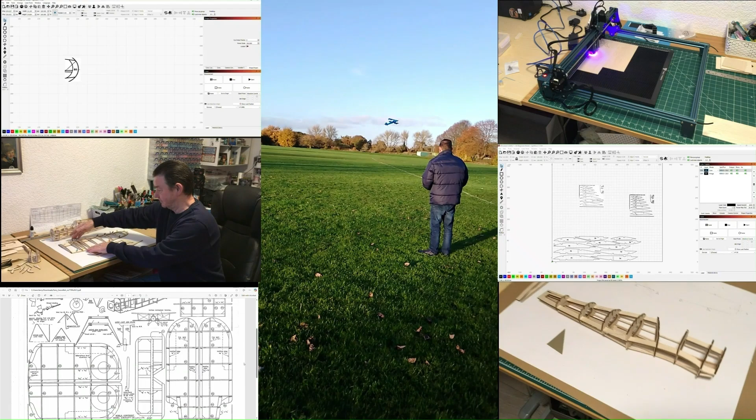Okay, so it's time to start creating the fuselage. Now I'm going to go by the rule that the fuselage should be around about 3/4 of the length of the wingspan. The wing we've constructed here is 500mm long, which means the wingspan is going to be 1000mm. So our fuselage needs to be 750mm long. So to start with, I'm going to create a center line.

I'm just going to put that center line there, and then I'm going to go to nodes. I'm going to select our center line, hover over it and press A. I now know that that center line is level. So I'm going to now make the first basic shape, a rectangle that is 750mm long, and that is basically going to be the center part of our fuselage. That's how long it's going to be. Let's move those down a little.

Okay, so the next thing I'm going to do is create another rectangle. Now this is going to be the cabin. The wing is going to sit on top of that, so it needs to be at least 150mm long. I want a little bit in front and a little bit behind, so I'm going to make this 170mm long, so that I can put something at the front to hold the wing in place and something at the back, and by doing that the wing will be secure and held nicely when we're flying.

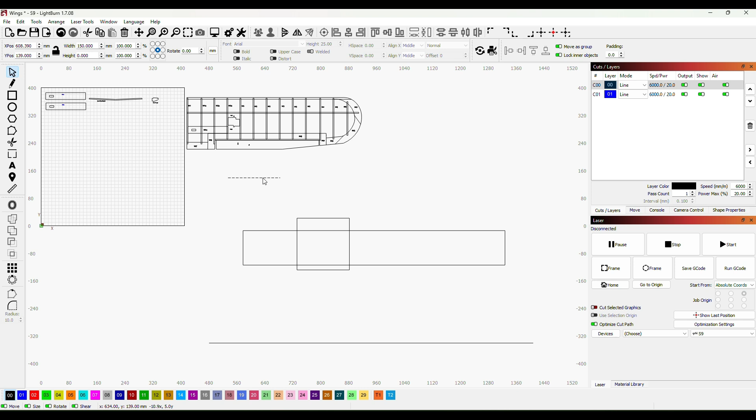Okay, so the next thing I'm going to do is drop the height of this to 150, just as a start point. Just check that we're in the right place still. Yep, that'll do. Right, now I'm going to select both of those, and I'm going to weld them together.

Bring our center line back, and I'll just center those using this tool up here. Now what I want to do is work out where the tail plane is going to sit. The leading edge of the tail plane should be behind the leading edge of the main plane by 3 times the wing chord. So 3 times 150mm is 450mm, so we change the length of our measuring stick to 450.

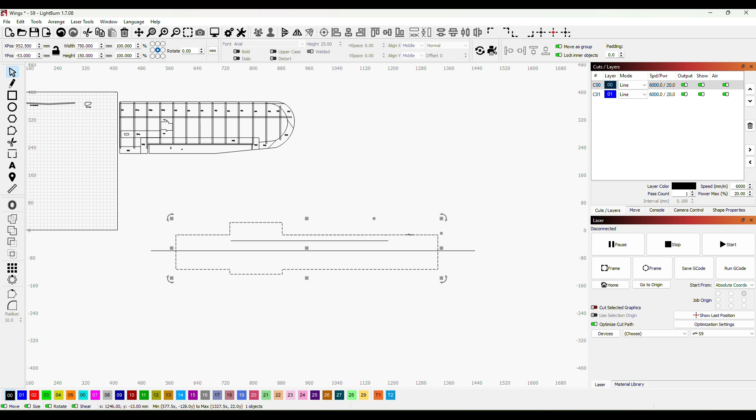Then all I need to do is drop this down here, and that's now in line with the front edge of the wing, and in line at the back here. So I go to nodes, and put a node right above that point. Hover over the line, press I, and then bring that node down until it reaches the centre line. Because I want that tail plane to line up with the propeller, in a straight line through the middle of the airplane.

So next I can delete this node here by highlighting it and then pressing D. And then I can start to put a little bit of a shape on the nose. There we go.

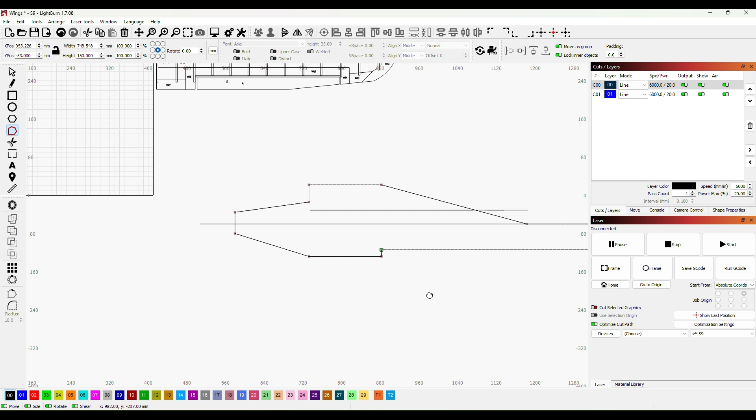And I'll just delete this node here by highlighting and pressing D. Okay, and I can then delete this node here. So if we come back to nodes and we come to this back end, all I want to do is bring that shape up.

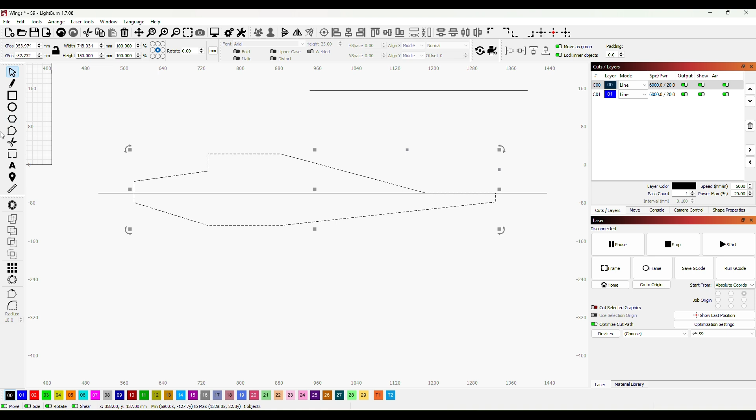Okay, so if we now select nodes again, and in the middle here I'm just going to put a nice smooth curve node. So I'm going to insert, and I'm going to convert that to a smooth curve node and just give us a little bit of a shape there. And then I'm going to put another node, insert, again a smooth curve node. I'm going to take that one in slightly, a nice curve there.

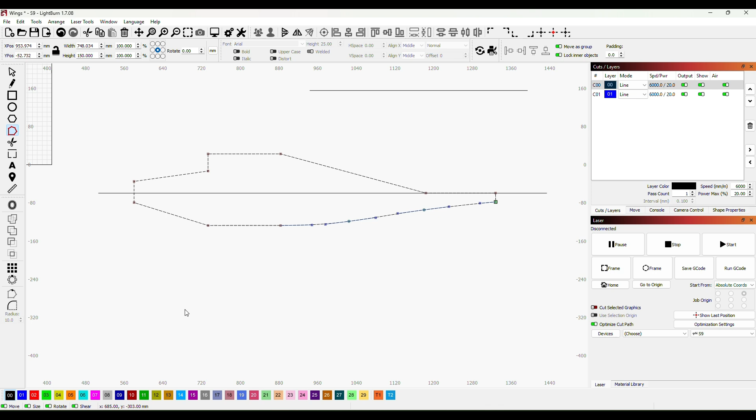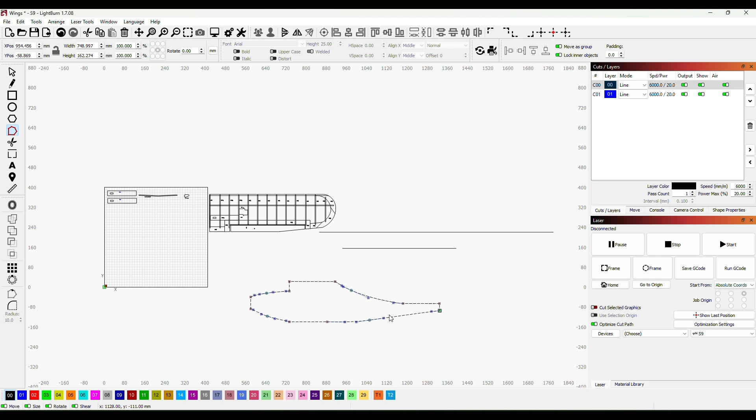Okay, and then if we come to the center up here, we'll put a smooth curve node in there and just give us a nice little shape down from the cabin. And then up at the front, just going to give us a bit more shape here. Okay, just keep tweaking these a little bit until we get a nice shape.

And the key thing is that where the tailplane will sit at the back will be in alignment with the propeller. Okay, this looks a little high in the middle here, so I'm just going to bring the whole thing down a little until it looks a little more sleek and reasonable. Now I've seen some planes that are quite tall and some that are quite wide, some that are fat. I mean, the Popsy is an example which flies really well, but I just want this to look a little sleeker, and that there now looks like a better shape.

So what I'll do now is I'll highlight that outline, and then I'll bring an offset in 4.6 millimeters, because that's the balsa that I'm going to use on the outer edge. Okay, so that's more or less the outer edge. Now what I want to do is just check some of the dimensions, and then I'm going to start putting the formers in, and then we'll do a plan view, and that will give us the size of our formers. It'll give us the height of them and then the width of them as well.

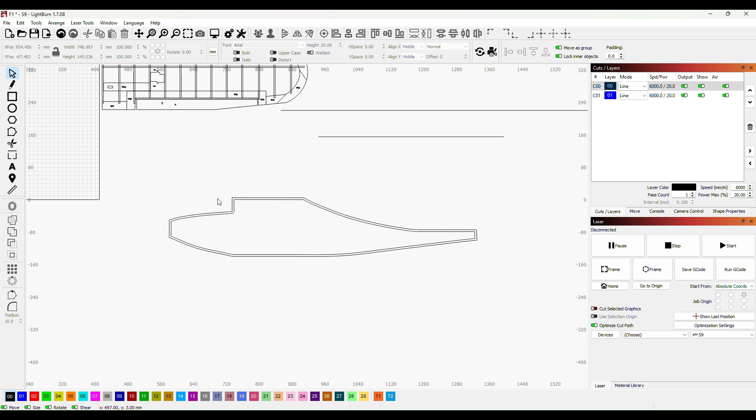And also I'll be looking at this top of the cabin here. We'll be shaping that round our wing ribs, and I'll also be setting an angle of incidence on this as well, and I'll come to that in just a few minutes. So next, in the middle of these two, right down the centre of the cabin, I want an upright. So this won't be a former, this will just be part of the side of the fuselage.

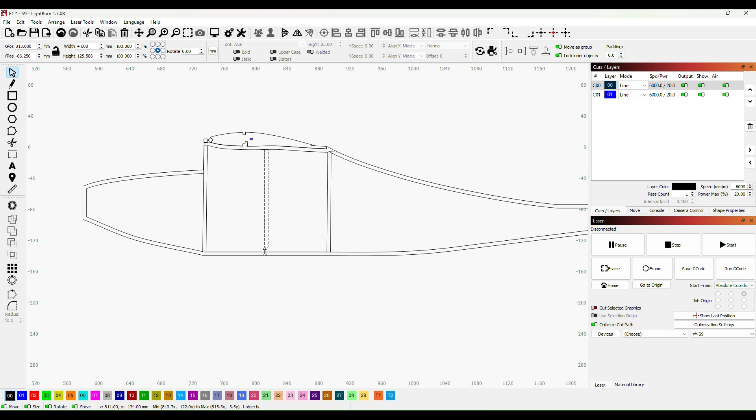So all I'll do for that is I'll just make a length. I'll make the width of that 4.6, and then all I need to do with that is put it where I think it's right, and then I'm going to just bring that up and bring it down so that it fits nicely.

So what I've done is I've just flattened the bottom of this cabin top former here, and we'll mark that out and we'll cut that out in a minute. And below it, I've put in two 4.6mm crossbars there, which will essentially make the windows. The windows will be square. Okay, so that's where we are at the moment.

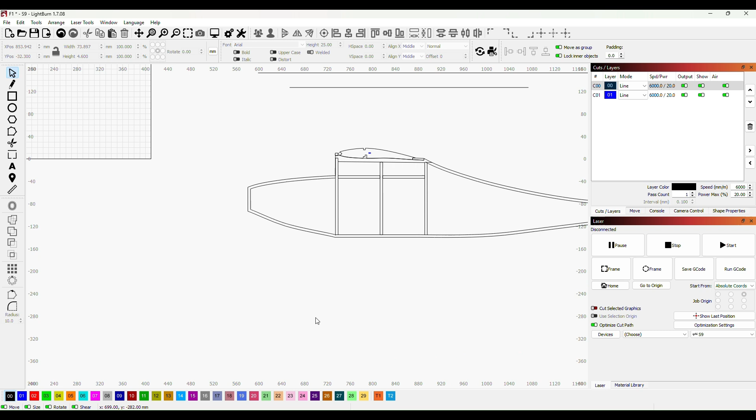Next, I'm just going to put formers down towards the tail, and also towards the nose. And we'll have a look at those formers in just 1 minute. So 4.6, and then I'll just copy it and I'll put them in place.

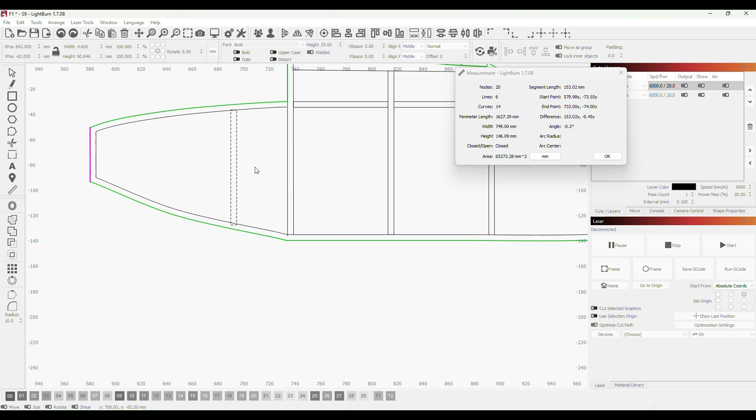Now I want 3 formers coming down here, 1, 2, and then 3, and then we're going to have a nose. Now we just measure from there to there is 153mm, so if we put these 40mm apart, it'll take us down towards the nose nicely. So I'm just going to make a little measuring stick, and we'll just quickly level that up, go to nodes.

I say that's now level, and the length of it I'm going to make 40mm, and I'm going to use that just to position my shape.

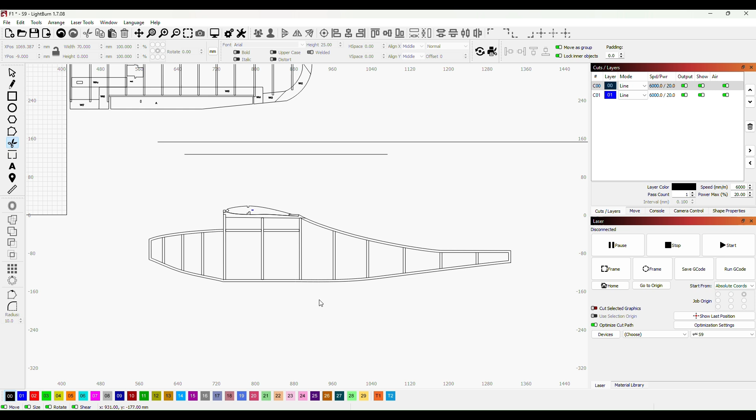Okay, next thing to do is create the plan view, because with the side view and the plan view, we'd be able to get the sizes and shapes for our formers. I personally like the look of an aeroplane where it's slightly taller than it is wide, so I'm going to make the plan view in 2 parts. I'm going to make half of it, then mirror image it, and join the 2 together. First thing is to make sure it's exactly the same size as what we've got now.

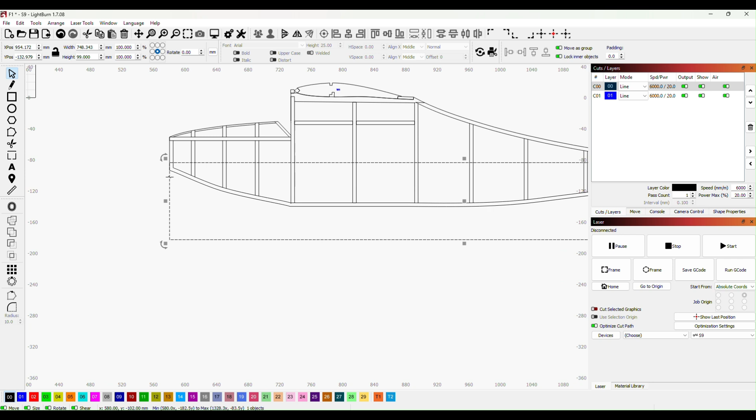That is 748.343. So I'm going to make this shape 748.343, exactly the same, and then I'm just going to bring it into line just on the end there with our side view.

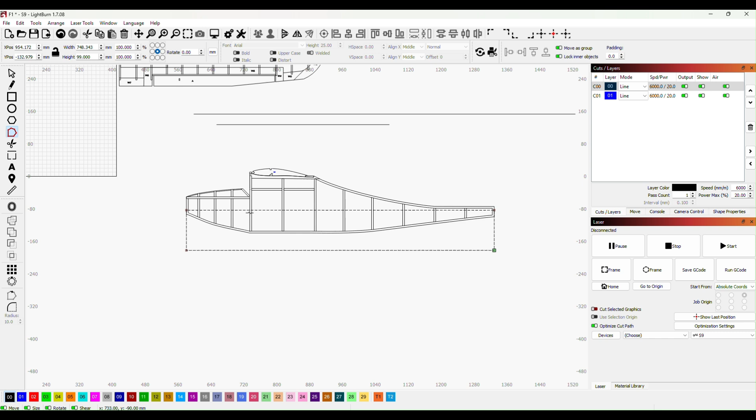So if I now convert that to a path so I can go to nodes, and now if we go to nodes, I'll be able to place a node right on our former 1 by going insert, then come to former 2 and insert again. I now have a node right over those two, so I'll just bring this down.

All I'm going to do now is go back to nodes and shape the plane. So looking from the top, the nose will come in, and so will the tail. The tail will come all the way down 4.6 millimeters to the point where the two sides of the airplane join. I'll just measure that again.

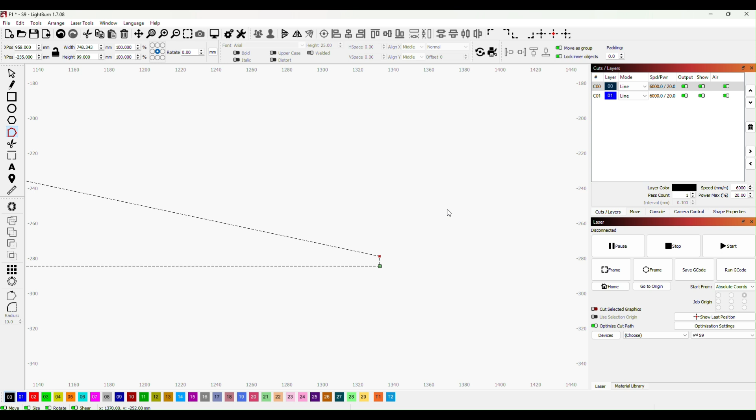5.65, so I just want to take 1 millimeter off that. So just go back to nodes, select that node, press Control and the down arrow, and that's 1 millimeter off. So that will be around the right size.

Okay, so what I want to do now is put another node in, just in there - insert - and I'm going to click on that and press S, which will convert that to a smooth curve node. And I'm just going to bring that out slightly, just to there.

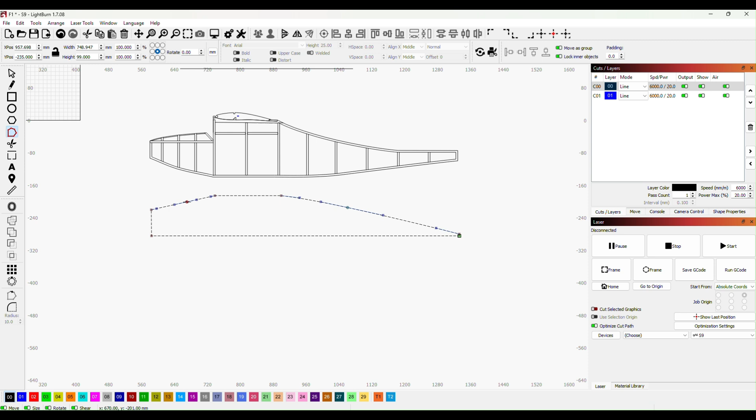Then just alter the end node, and then I'm going to put another one in, just about there. So insert, and then turn that to a smooth curve node. All I'm intending to do here is give our nose and slope towards the tail some shape, which will make it look a lot nicer.

Right, so what I'm going to do now is change the height of this to around 44 millimeters, and then I'm going to make a copy.

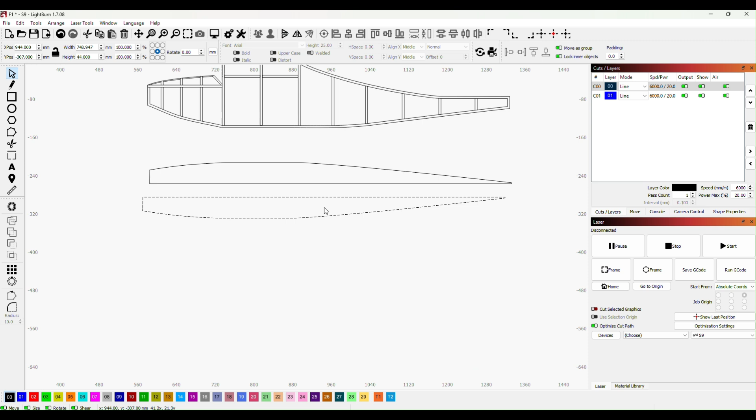I'm going to flip that copy and then join the both together. Now all I want to do here is make sure that that's right on the line. It should snap to that line. There you go. And then we can move the whole thing across.

Till they're exactly in line. And if I select them both, I should be able to weld them together nicely, and I've now got the shape for our plan view.

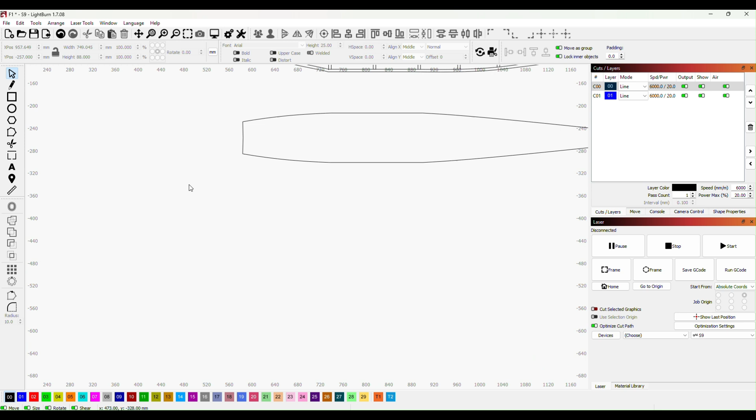Let me just check the straightness of this. I think we'll probably find there's a node in the middle there. So if we go to nodes, all I'm going to do is delete this node at the end, and that will straighten out the nose. Select it and press D, and that node has now disappeared.

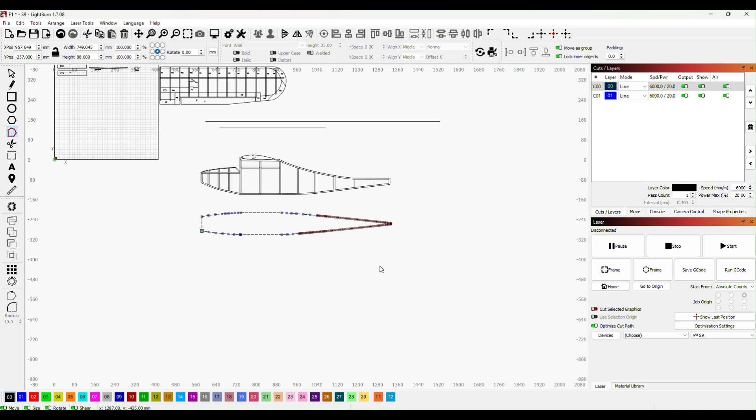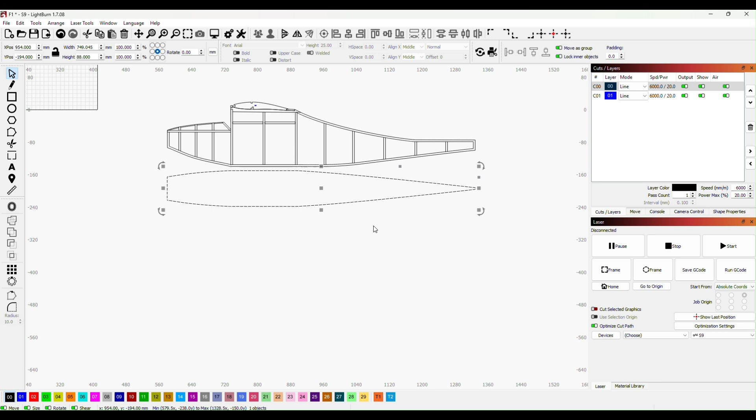So next, what I want to do is put all of our cross braces in, and I want them to be in exactly the same position as the ones on the side plan. I've lined up now on the front here, so I know that's exactly in line with the side view. So if I press my shift key and then my down arrow, that will move me 10 millimeters at a time, and all I want to do is just move down to there.

So what I want to do is come inside now using our offset tool, and I'll come inside by 4.6 millimeters, just like that. So that gives me the outline.

And if I come to this, the back here, I can put a snap to that corner, I can put a line into the center there, which will be where the two sides join, and the rest I'll show you how we do that right now.

So all I'm going to do is make a shape, and this is going to be 4.6 millimeters wide, and then I'm going to copy that shape, Control C, and I'm going to put one there, one there, across each position.

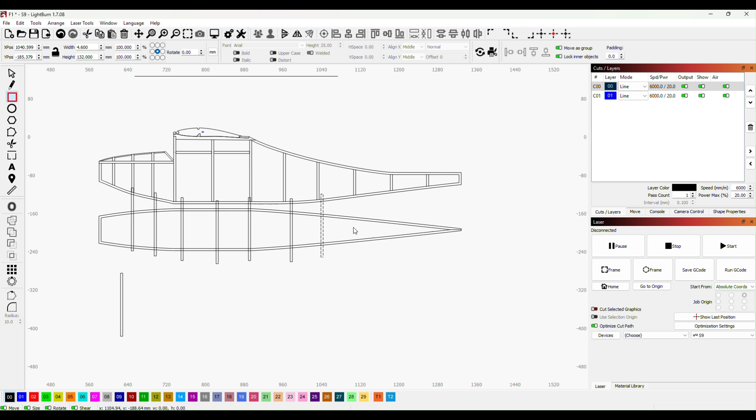I'll align these in just a second, and all I want to do is make sure that they cross, that they align with the ones on the side, and then they cross our plan at the bottom.

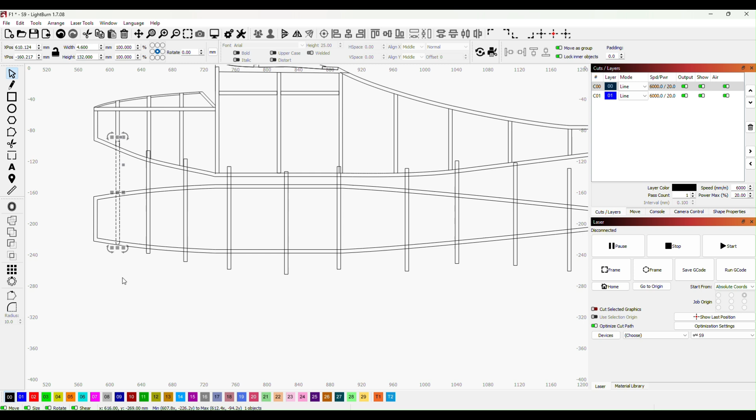All I want to do now is select our shape and then press Control and just select each of these, just like that.

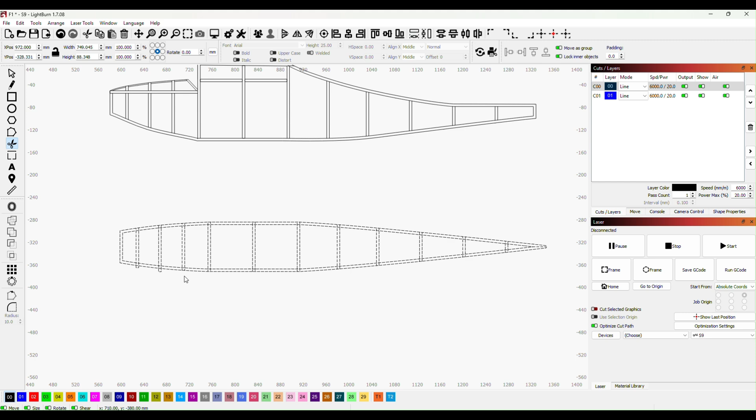So next I want to get my snipping tool. I want to just take away all of these.

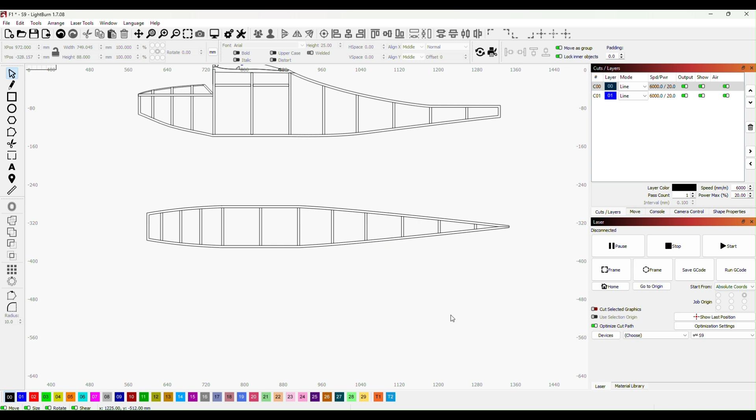Now all I'm going to do is group that whole thing, and we now have our plan view. Now there's a few annotations that I want to make on this plan view.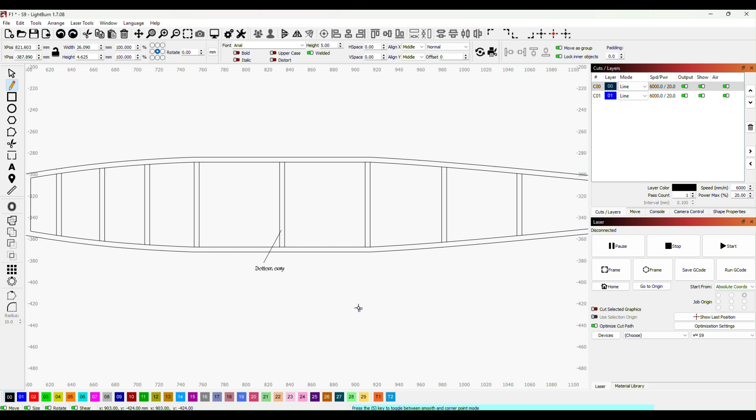For example, this center spar here, this cross brace here, on the bottom only. So I'll just put that in, and then we take a little line from there, just like that, and that'll remain on our plan view just as an annotation.

So if we make the former that is going to sit right here, now this upright is going to be from 4.6mm balsa, and right behind that I want a 3mm former which is going to be made from plywood, and that's what I'm going to do now.

I'm going to make that former now. So all I'm going to do is start with a square, and I'm going to make it the size coming up to the top of the cabin former there, and then so that's going to be the height.

Now if I just move that out of the way, then that former will correspond with this cross brace here. If we measure from there across to the other side and meet the line there, that is exactly 88mm.

So what I'm going to do is make the width of our former 88mm.

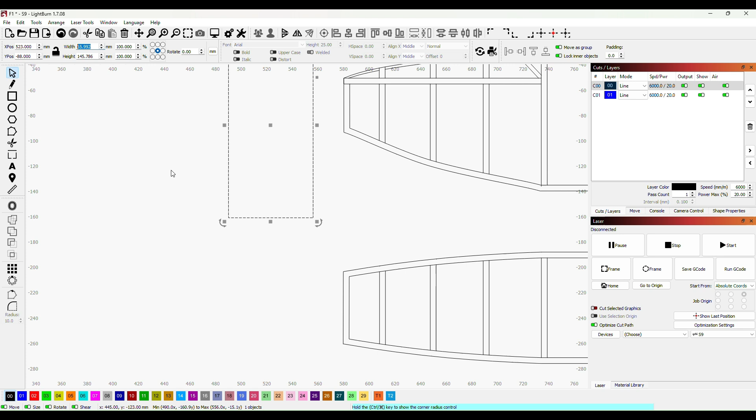Now at the bottom I'm going to need two 4.6mm cutouts so that it will fit straight on the bottom of our fuselage.

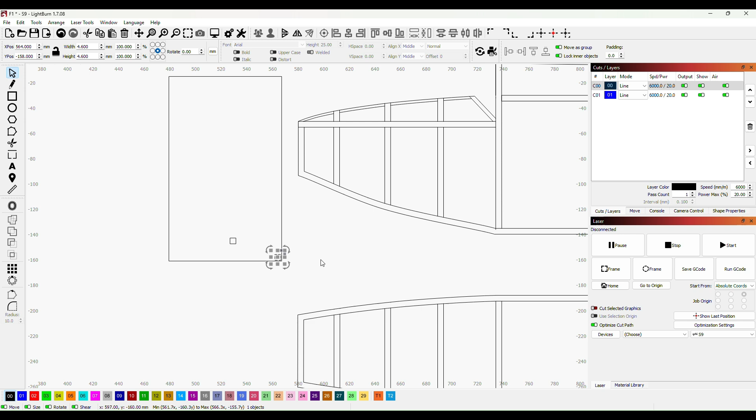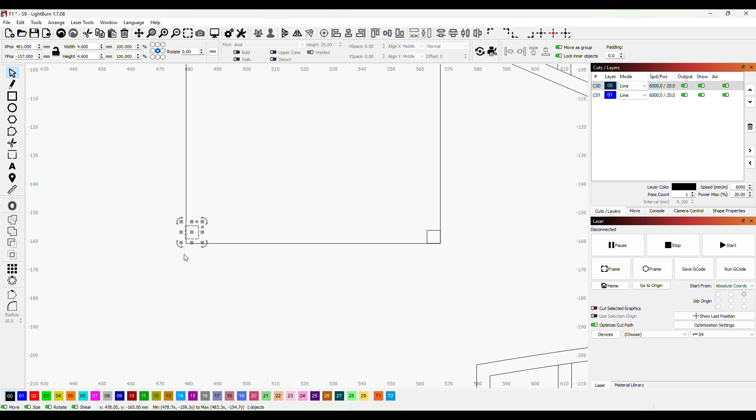Bring that over, Control C, Control V, so I've now got two of those, and I'll place them right in the corners at the bottom there. There we are, snapped into shape or snapped into place, and then I'll do exactly the same on this side. There we are, snapped into place.

Now, without increasing the size of the square itself, so I won't use a diagonal which would increase it proportionally, I just want to overlap there, and I just want to overlap there.

And now what I can do is I can use our snipping tool to take out that piece and that piece, and now I've got that shape cut in.

So in exactly the same way on this side, I'm going to select that shape, just make sure I overlap there, make sure I overlap there, get my snipping tool and just take out those extra bits. I've now got the bottom of our former shaped.

Now at the top of the former it's going to meet the cabin former at the top, this piece here, which will be cut out, and that will be so it will meet that.

Now what I want to do is our former will have a slot in it which will be exactly this big. Now if I make a shape in there, it will snap to the sizes. There we are. So I can make that shape, and I can now cut that out of our former.

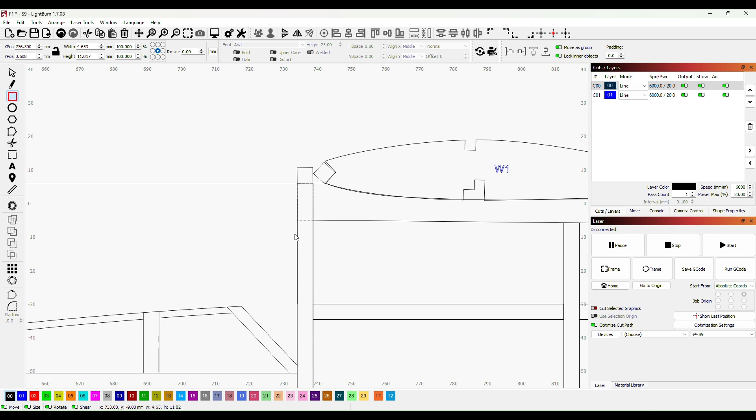Because that is 4.653, so I'll just make that 4.6 wide so that it is precise. There we go. So it's now 4.6.

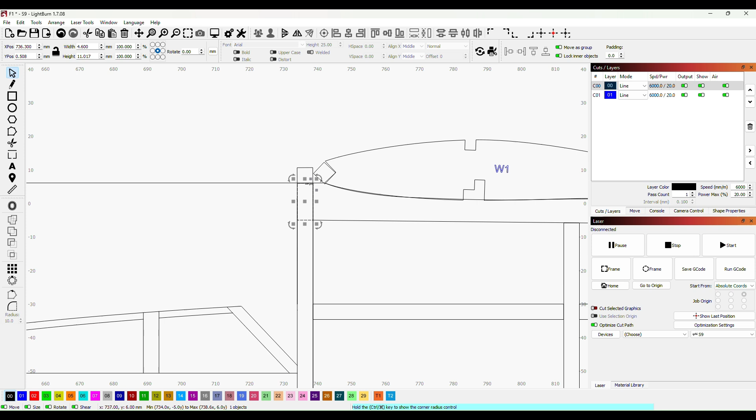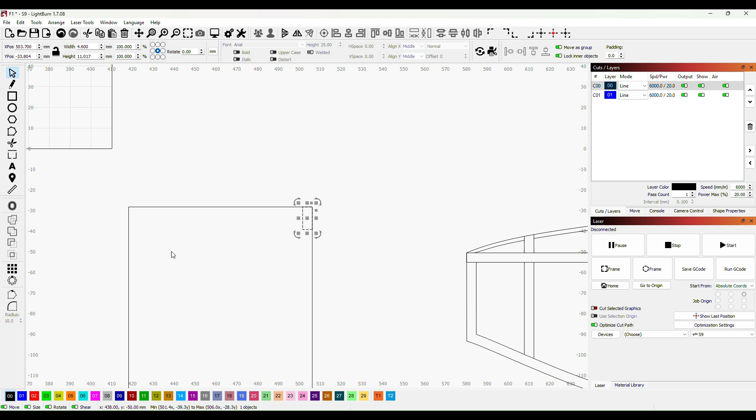I'll just move our former across, and then I'll grab my little shape I've just made, snap to the top line. There we are. And then if I copy and then produce another over here, I can do exactly the same in this corner.

There we go. And then once again, if I just extend across there and then extend across there, I can get my snipping tool and just take out those bits.

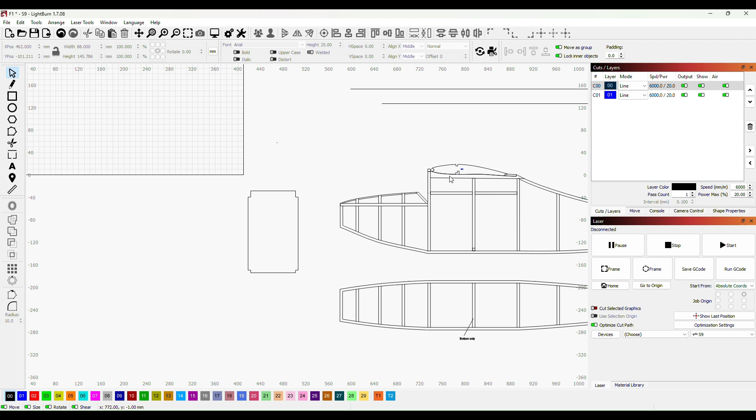And then do exactly the same with this corner. There we go. Now the top of this is going to meet this dihedral, because the aeroplane, if we were to look at it from the front end, there's going to be a dihedral in this wing, and we've already got that shape.

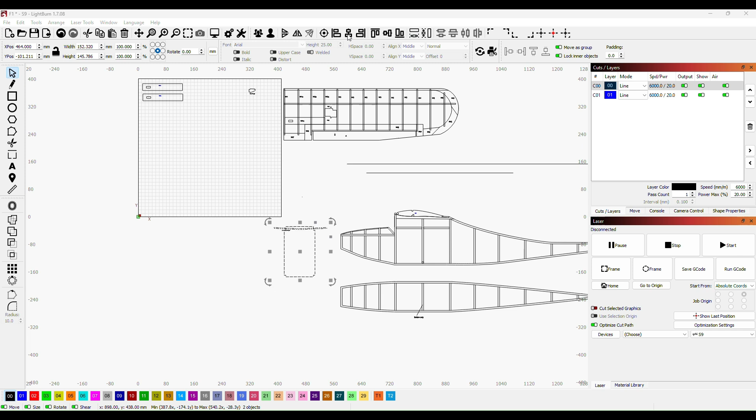We made it up here, so I can bring that down. And then what I can do is, if I use this tool up here, I can center that. So with those centered, what I want to do now is just take the dihedral, and all I'm going to do is move it up until this bottom edge of the dihedral meets the top edge or the top corner there. So I'm just going to slowly move that up. And now we're touching top and bottom, or touching both corners.

So I want to cut the top of our former to fit that dihedral, and the way I'm going to do that is very simple. I'm going to go to nodes, click on our shape, insert a node by hovering over it, insert right in the center, and then just bring that down to touch that point there.

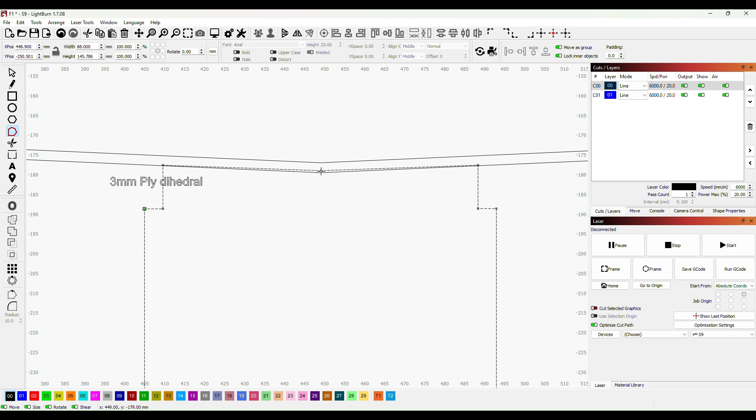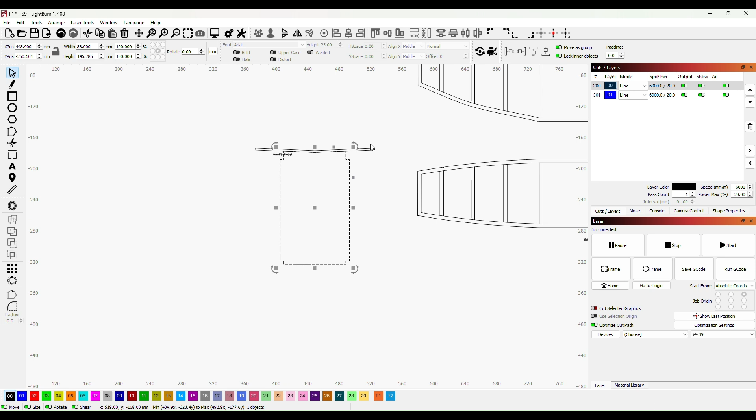And we now know that our former has got the correct size dihedral, and that will just fit nicely. So I can just take this shape back out the way and put it back up there.

Okay, now the centre of the former, what I want to do with this former is I want to connect the wheels to it. In the first instance, we'll...

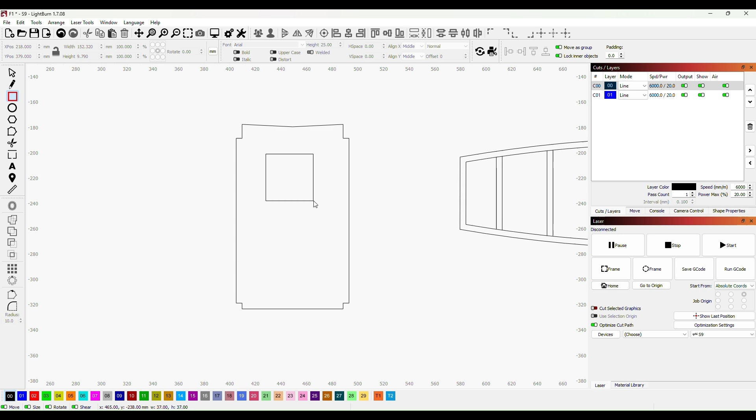Just make a couple of windows and centre those on our shape, and all we need to do to accurately centre those is select them all and then go to our centering tool.

Now the wheels, the metal for the wheels, is going to come up along, come down and then go out the side there, and it's going to be bound. So all I'm going to do to make that happen is arrange a row of small holes.

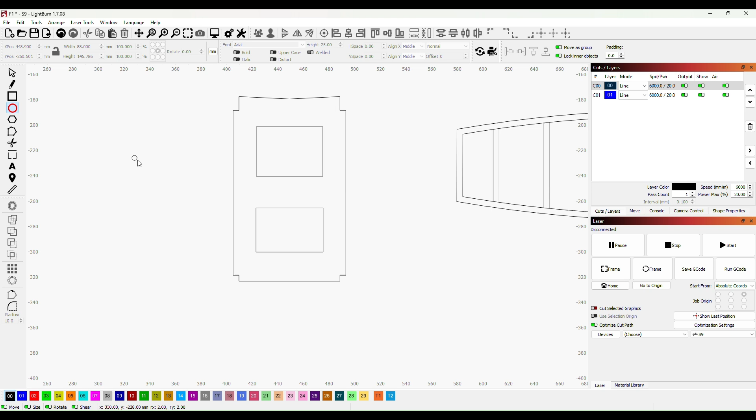So if I get this circle and make that 1.5 millimeters - so I've made that 1.5 millimeters - and what I'm going to do is bring it over, and then if I use a little box, the wire for the wheels will go down the middle of this shape.

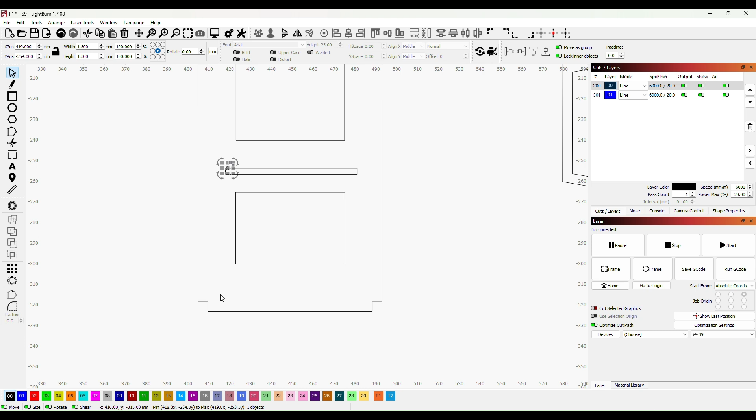So all I want to do is arrange these holes on our line, top and bottom, and if you have a look you can see it will snap into place, it will center on that line.

So that's all I want to do, and then I'm going to control copy, and I'm going to have five of these. Two, three, four, five. So what I'll do is move the next one, put that straight on the line.

Get the next one, put that straight on the line. I'll leave 1.5 millimeters between them. I'll equally space these to be fair.

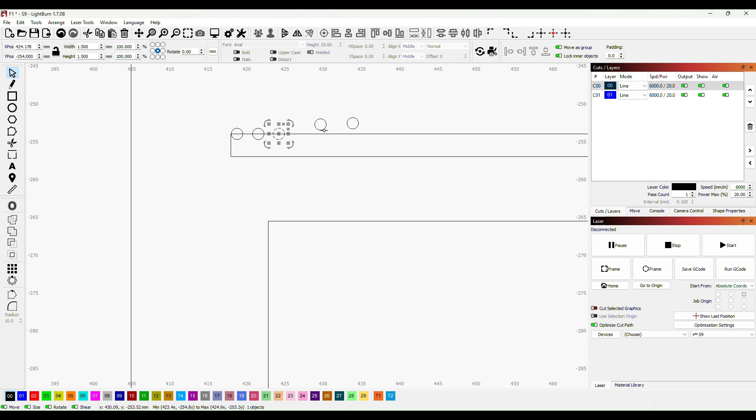So that's those reasonably evenly spaced.

So what I want to do with those now is just move this shape out of the way, and then copy those in a little bank like that, and then Control Z, put that back where it was, and then come underneath and put those right below where those ones are, and then do the same here.

And all this is a way of binding. I'm going to use these small holes that we cut out to bind the piano wire to our plywood former.

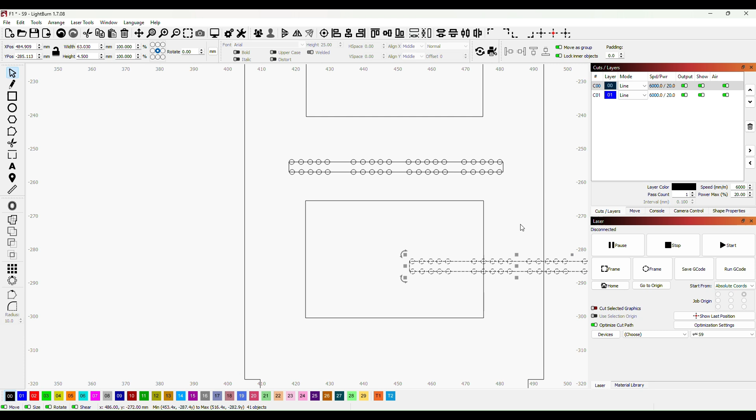There we go. If I copy that whole thing now, and then what I can do is paste that, and then I can put another one on this side.

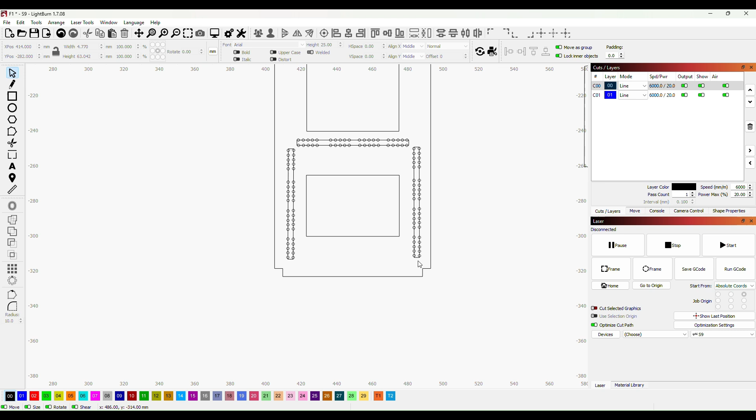Just like that. Now that that's all in place, all I'll be doing is binding through these holes, stitching the whole thing on, and all I need to do now is remove the background shape, and that's what our former will look like.

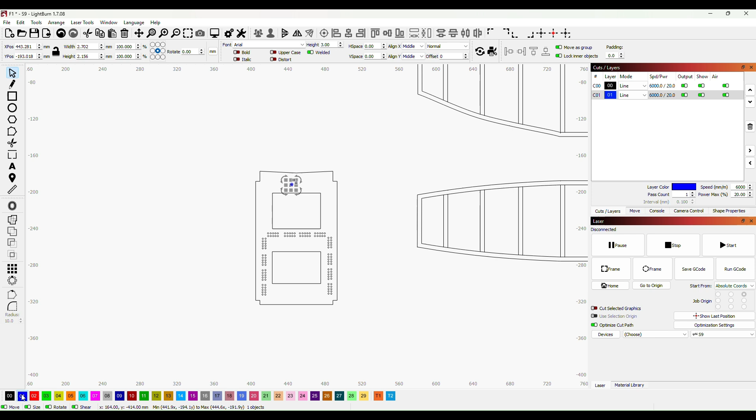So next I'll just label that up as F1. I'll adjust the height there down to I think 3 millimeters, and this will be F1. I'll change that to our engraving layer, and then I'll group the whole thing, and that's how I'm going to make the formers.

Okay, what I've done here with the former I've just made is I've just drawn a line. All I've done is use the line tool, and then I've drawn roughly what I wanted, just like that. And then all you need to do is get your nodes in the corners. You go to nodes, and then you can pull those around to whatever size you want them to be, or whatever shape.

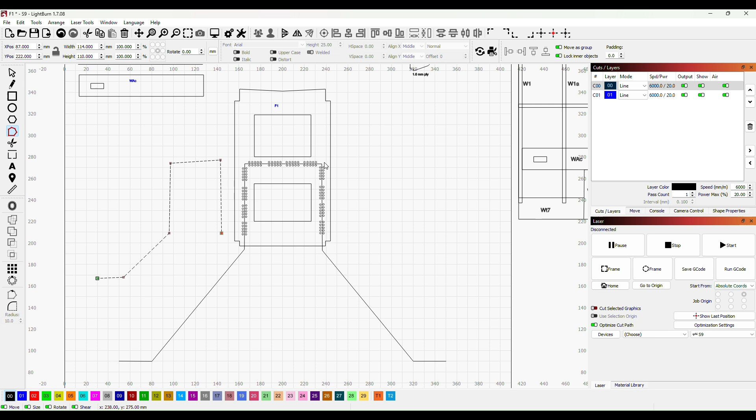And all I've done is I've superimposed that over the former so that we can make a pattern for our undercarriage. And when we come down here, I've counted from the center how many squares across, so I've made it uniform in that way. So very, very simple. You just make your approximate shape, and then you use the nodes, and you click on each node, and then by pressing Shift and Control and then your arrow keys, you can move that 2, 3, 4, 5.

You can move that 1/10 of a millimeter at a time to get really fine control. If you want to move quickly, if you just press Control, you can move it 1 millimeter at a time, like that. If you just press Shift, you can move a much greater distance at a time. So Shift and Control for very fine, just Control to get you roughly into shape, and then that's how you can form your undercarriage.

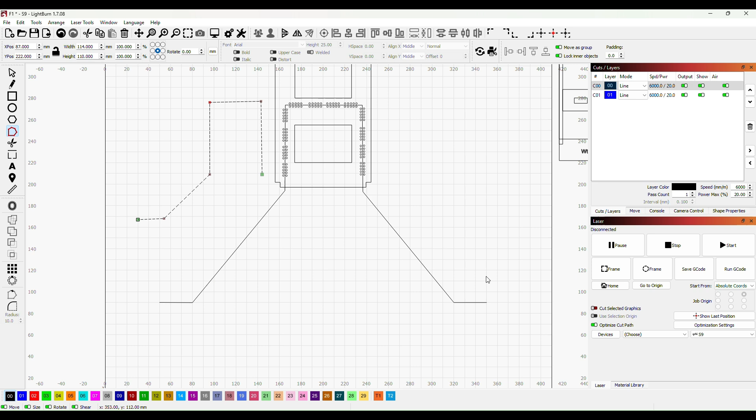So I'm now going to make former number 2, and I'm going to do it in exactly the same way as I made former 1. Best way for me to go about this, I think, is to just make a copy of former 1. Now let's get former 1 out of the way, put it onto the workspace, and we'll look at that in a little while. So if I come back to our new former, what I'm going to do is ungroup.

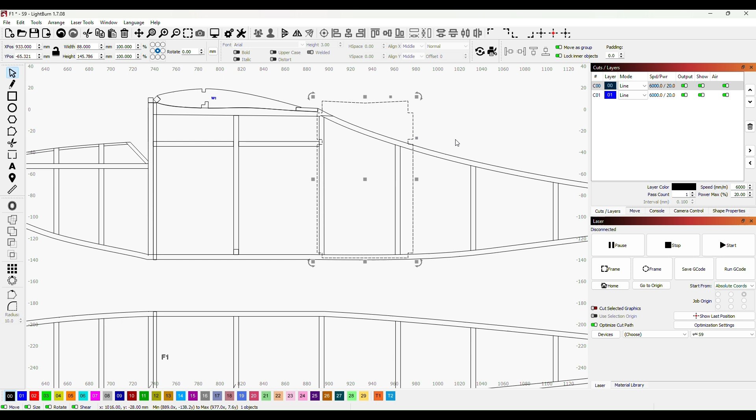I'm going to just take the outline away, to be fair. I'll just take the outline over here, and all we'll do is adjust the outline to fit this end, and then we can take it back so that these apertures in the middle remain the same, because we're going to have platforms in there for the battery and such. So if I just put this edge right on there and then come up to the top, we can see that our slot for the cross brace for the bottom of the cabin window is in the right place.

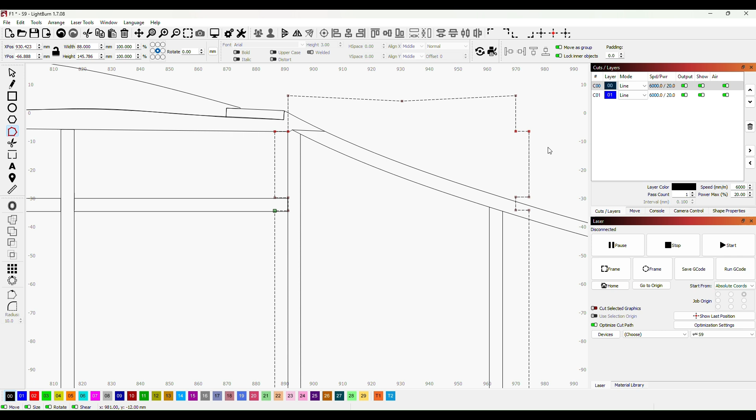So all I want to do is go to nodes. If I select all of those nodes, and then bring them all down, and then press Control and Shift, just take them back up 1/10 of a millimetre at a time, I know that both sides have now moved exactly the same. So what I'll do now is take the top 3 nodes, and I want to bring those down level with this trailing edge of the wing, because that trailing edge will be sitting on this former.

So Shift and Control, and then bring them all down. Go a little bit faster. There we go. And that looks about right to me. But if I move the whole thing across, okay, we can see that we're just maybe 0.5 millimetre low. So what I'm going to do is go back to nodes, just select the top 3 nodes, just there like that, press Shift and Control, and I'm just going to take that up until I'm happy.

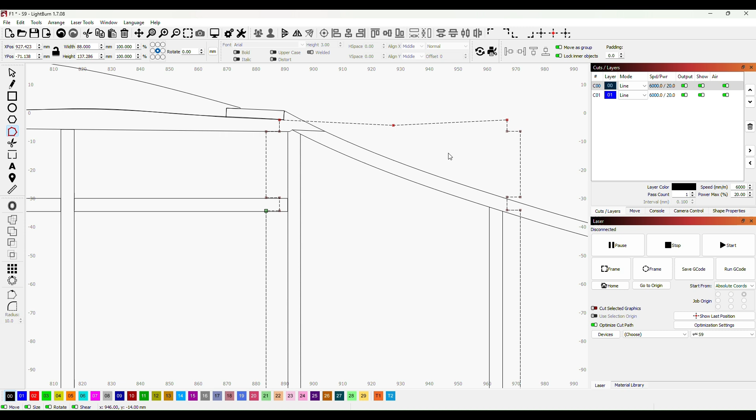There, that will be exactly the right height. So when we fit our former inside, that trailing edge of that wing will sit nicely on top. How we're going to do that now, I'm going to just insert that onto our drawing now. So all I'm going to do is make a shape,

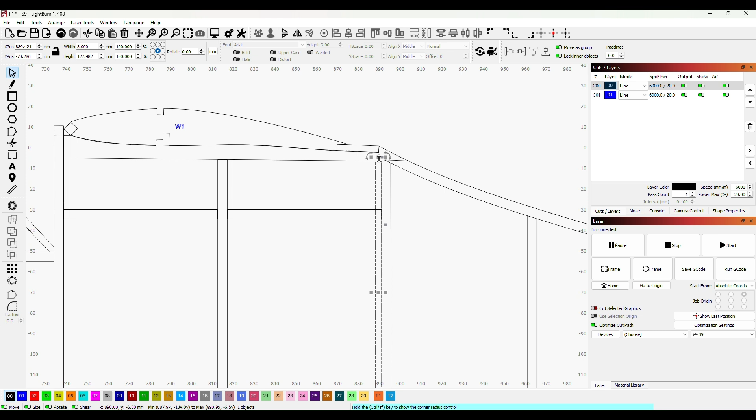and I'm going to bring it down to there, and then I'm going to make that 3 millimeters wide, and then if we come in a little, I can shift that across until it touches our, there we go. Just copy that and put it again down here, and then all I'm going to do is, there.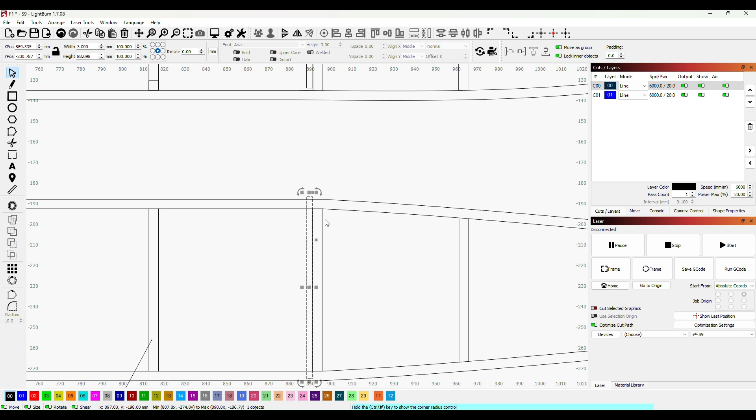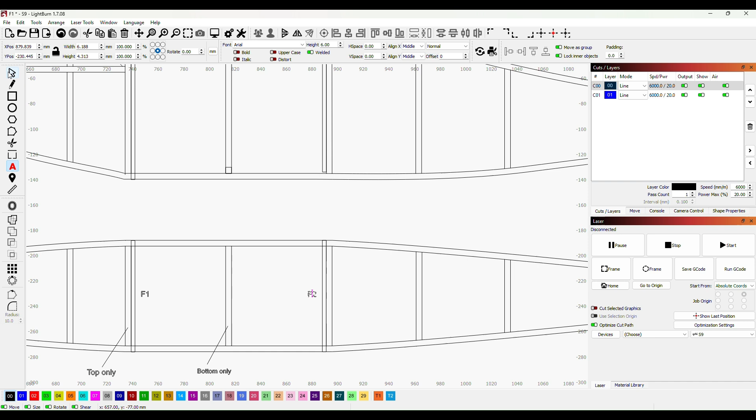And now we've got F2 in there. I'll just label that up. There we go. Okay, so that's former F2 made. F2. So there we are, I'll just group that. And that is former number F2. So we'll just move those back onto the workspace, and we'll position those again later when we make our 3mm or planning sheet.

Okay, what I want to do now is a little more detail around this nose area. So I think we're going to have another piece of 1/8 or 3.2mm balsa in the middle here, and I want to now put those onto our plan view. So this is the dashboard, and the cellophane or the windscreen will come down there. So I'll just put a little line where the windscreen is going to be, just like that. And there we go. And you know, I think I'll leave that blue, to be fair.

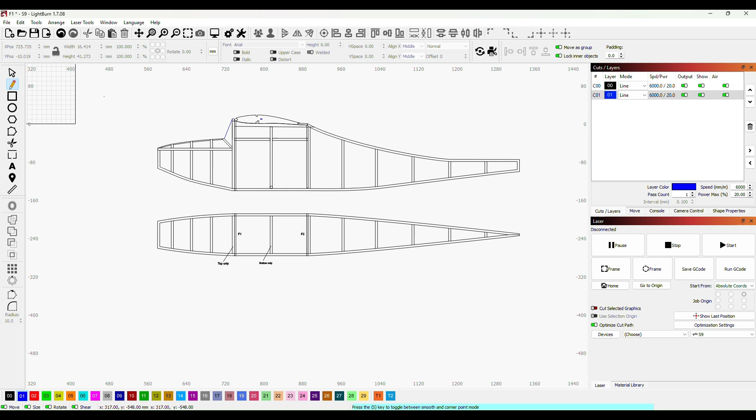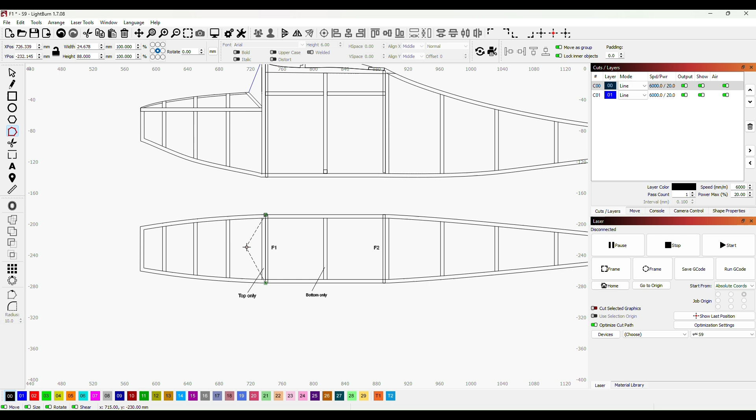Okay, so on the plan view, we're going to come from the very outside to the midpoint, and then back to the very outside again. Now if we were to select nodes and then convert this to a smooth curve node by hovering over it and pressing S, we can then alter these slightly and just show what that dashboard will look like from the top. And there we go. From the top, that dash will look like that.

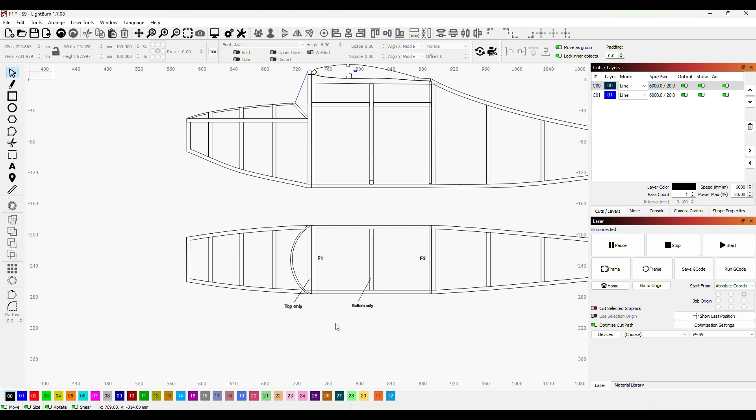Now that will have a bit of depth. So all I'm going to do is do exactly the same again. Just like that. And go to nodes. Just bring this to where the center is, and then convert that to a smooth curve node like that, and then bring these corners out just like that until we get our 3.2mm, there or thereabouts, piece of material. Okay, so that's our dash. That's what that will look like from the top, and it'll be put in at that angle.

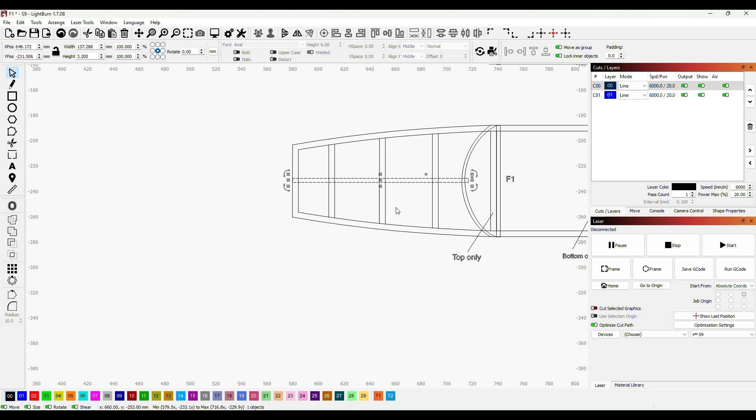Now from there that will sit right in the center there. Okay. And there we have that. So what I want to do now is put another piece of balsa straight down there. The way I'm going to do that is just make a straight piece, because it's hard to judge the angle this will be at because we're looking at it from the side. So I just make that 3.2mm high. There.

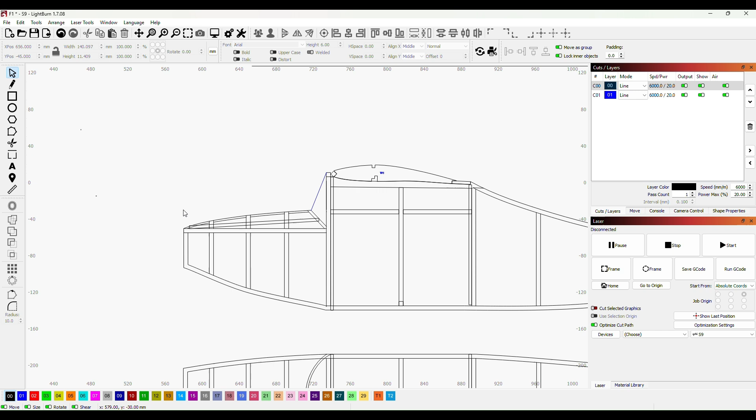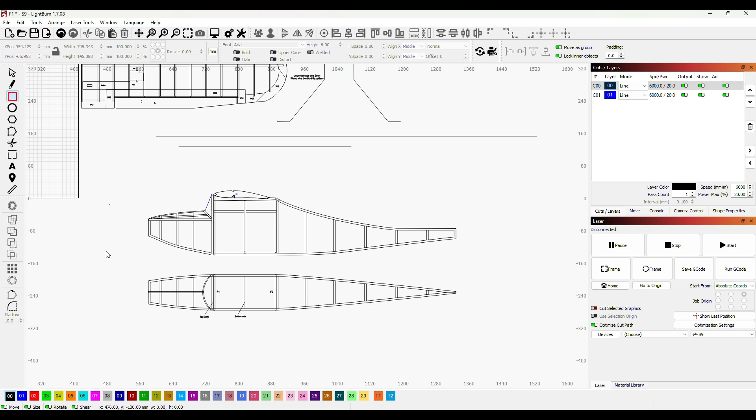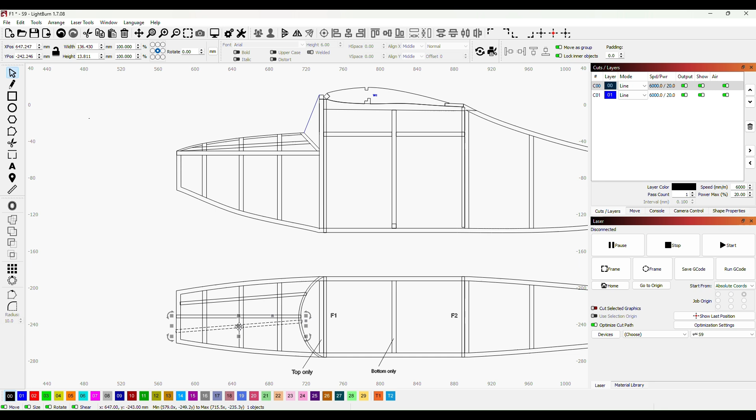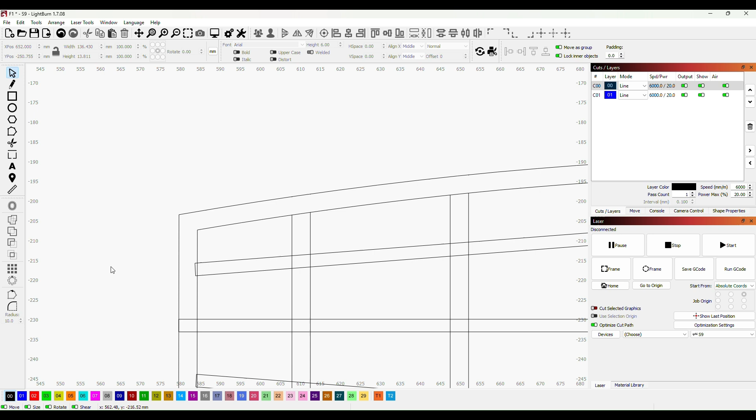Okay, now I'll just take our little snipping tool and take these extra bits out. There we go. So that will look very much like that. Okay, so if I copy that and then I flip it, we'll have exactly the right angle to match that on the other side. And there we go. So I'm just going to zoom right in, get my snipping tool and just tidy that up. Okay, there's a little bit more detail. So we've done two formers and a little bit of detail around the nose, so we can see what this is going to look like.

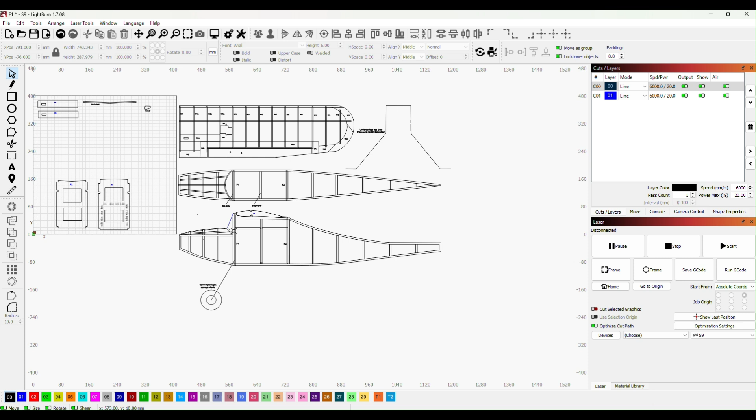So I've just arranged these now just off the LightBurn workspace, because I want to put these into position so that I can print it out as a full-size plan to go with all the components when they're cut out, and I'll be coming on to that in future videos. But I've added the wheels, so this framework that we made a little while ago, when it sits in, it also has to be angled forward, and you can use this as the pattern for working that out once it's full size.

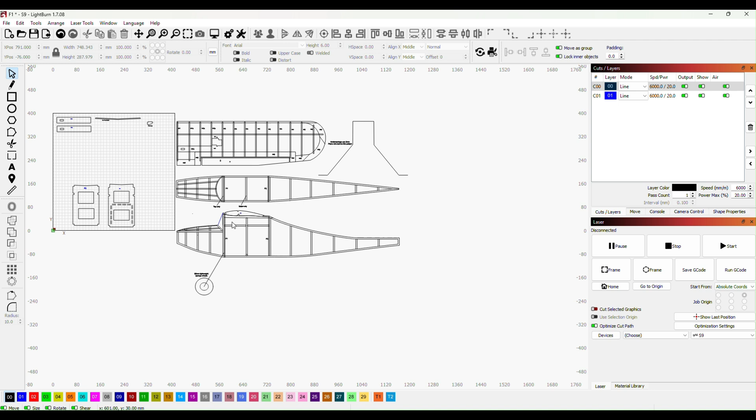So I'm going to finish the video now, and in the next video I'm going to complete the formers, put the back wheel on, and that'll come down and then go towards the rear, so there'll be a little bit of suspension there with the way I angle it. And I'm also going to create all the shapes for these nose formers and this former here, put them all on the workspace, and then we'll be ready to cut them all out and build our aeroplane.